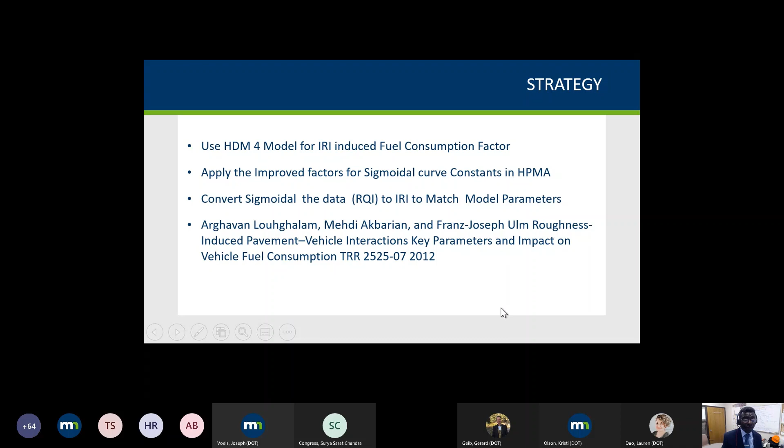But if you want to analyze IRI-induced fuel consumption, that's roughness-induced, and there's a performance curve for a particular intervention, that curve has already taken a lot of things into cognizance, and can be used as a comparative method. Over the years these performance curves have been developed, and we're not here to reinvent the wheel. A lot of work has been done. A lot of people developed the HDM-4 model and transcribed it into fuel consumption in various ways, but nobody has actually used the performance curves, and that's where we come in.

Over here, we'll be mentioning ride quality index. What's ride quality index? This is what MnDOT uses in its pavement management system. It is a rating ranging from 0 to 5, where 0 is extremely horrible and 5 is very good.

When a pavement is new and pristine, what we expect is that when people ride on it, they'll have a rating of about 5. That's what we always hope for. That might be utopian, but to a large extent that's the hope. Some do make very close to it.

In those days people would grind to about 70 inches per mile, but these days people grind to about 30 inches per mile. So technology is improving, and you'll find people really hitting that 5 very well these days in terms of the ride quality index.

How do we do it? We blindfold - well, we don't really blindfold people. We have individuals ride on a particular section and score it, and some of them are wise enough to close their eyes so they're not influenced by other things, like thinking the scenery is so beautiful that it must ride well. No. So with that rating, we use a vehicle.

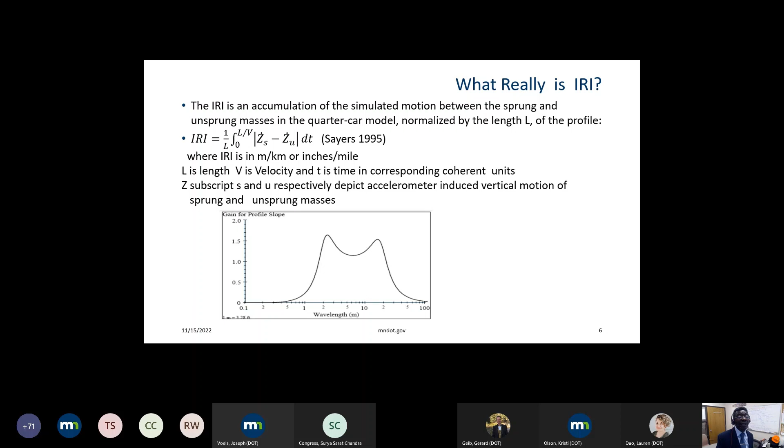The quarter car algorithm has a multiplier, or a gain function, that amplifies certain frequencies to the point that you have body bounce and axle hop. These are the two peaks that you see in that gain algorithm. So the IRI measurement, what the quarter car tries to simulate, is really how you feel based on certain waveforms. So it's not really just the profile itself, but what the quarter car interprets that profile to be in terms of how comfortable you will be riding on that surface.

Concerning the fuel consumption that's based on IRI, MnDOT has had a lot of studies. In 2011, we brought to the United States the Technical University of Gdansk, Poland, within a certain extension of a pooled fund. They came in 2011 and 2014, and one of the things we found out was they did a distribution to see how rolling resistance behaved.

Talking a little bit about the kind of rolling resistance they measured, they canceled out IRI, because IRI in itself will work within rolling resistance and will work under powertrain as well, in terms of the resistance the vehicle undergoes while operating on the roadway.

So people, the Mark IV, actually did cancel out IRI so that we were left with rolling resistance. Now, rolling resistance is a measure of the kind of resistance the vehicle encounters while moving, and that resistance is not due to aerodynamics, neither is it due to friction, but it's a resistance that the surface imparts on the vehicle. So because of the confusion, and the fact that there's a lot of intersection of rolling resistance, IRI, and friction, and people are not able to really separate one from the other, the feds now came up with PVI. So when they're analyzing all these things that have to do with rolling resistance, effect of IRI, effect of deflection, and so on, they will just say PVI, which is pavement vehicle interaction.

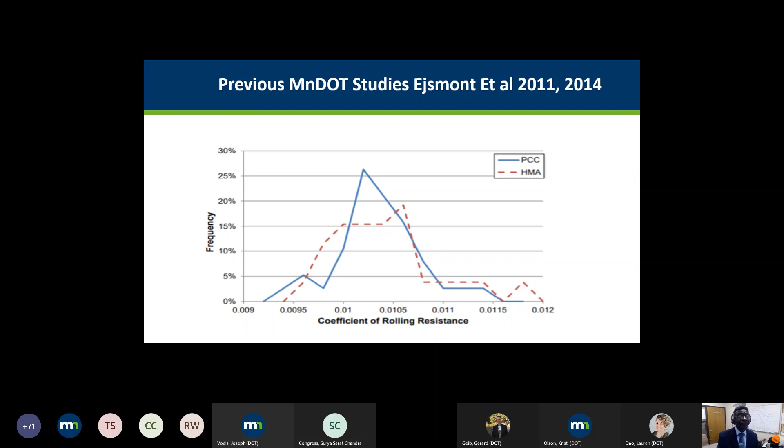So when we saw these, we retained a company called FuelMiner, and we made them go to two very poor riding sections. Highway 66 is an asphalt pavement, and Highway 10 in Staples is a concrete pavement.

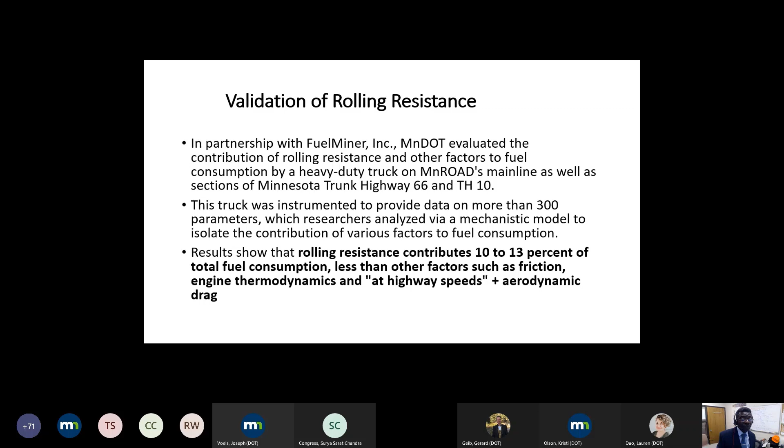What they found actually showed that there were some features which they had already originally interpreted as rolling resistance. There were some features in the concrete occurring at a certain frequency, and with that frequency they could pick up that there was a real energy loss in that concrete, coming from the joints, because the joints were actually shot due to the age of the pavement.

There was a lot of faulting, but it showed up probably as poor IRI, and they did notice that it was contributing tremendously to the power loss in the vehicles.

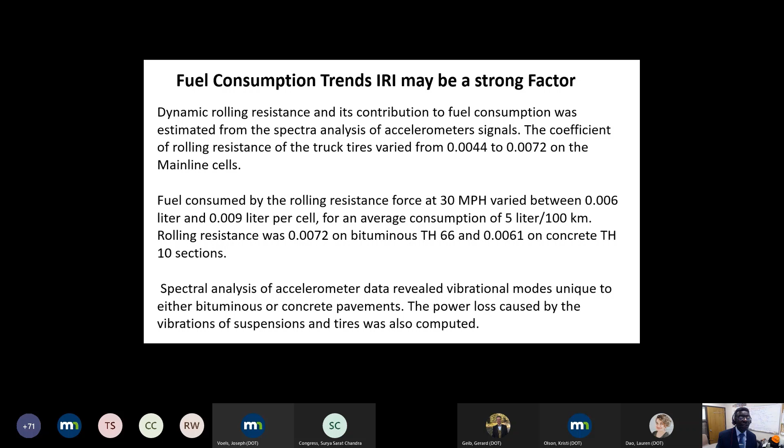They made the same observation at MnROAD. There's a 2.9 Hz concrete power loss. So you can see those are the features that trigger IRI: faulting, warp and curl, all manner of distress types.

Those are the things that trigger IRI.

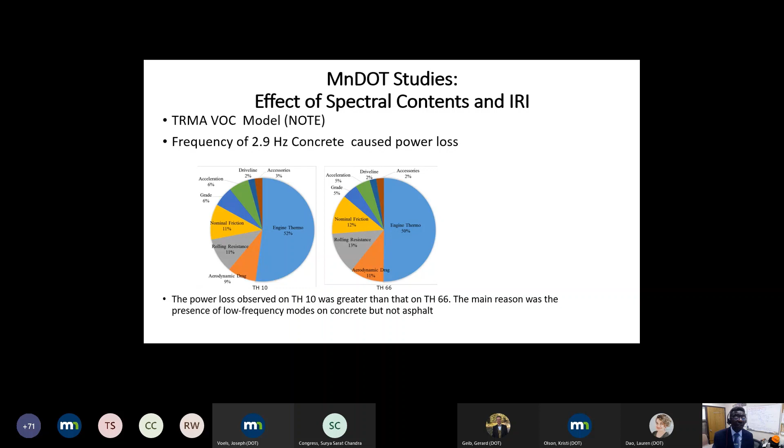But even when looking at the effect of IRI on fuel consumption, FuelMiner picked up the IRI-implicating features of certain pavements and projected them to be causative to the calculated fuel consumption in those test cells, as well as the network test cells that we looked at.

So when we brought the Technical University from Gdansk, Poland, we used the Mark IV, which is the number one rolling resistance measuring equipment in the world. We brought them here, and the principle by which it works, you saw some 0.003 — it's a torque divided...

I just want to go back to the fundamentals of mechanics. When you have your moment of inertia and you have angular acceleration, what the Mark IV actually does is, at the end, it converts that angular acceleration into a torque, and the angular acceleration into just a rotation in radians.

So when you see a rolling resistance measurement of, say, 0.003, what does that mean? It's just a torque, and it's the angular acceleration, the angular displacement that is due to a torque. That's what the Mark IV normalizes.

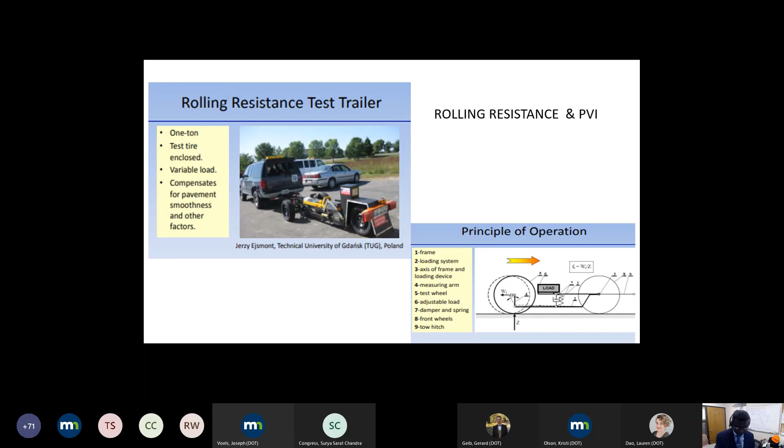But they had to cancel out IRI so they could get just the effect of rolling resistance in this device. It told us a lot, like the kind of fuel consumption numbers — there are a lot of variabilities, but something like a 10% saving on rolling resistance will result in 2 to 3% reduction in fuel consumption.

There are a lot of variables that can influence that, but these are some of the findings we made when the Technical University of Gdansk came and did their measurements at MnROAD. They came in 2011 and then again in 2014.

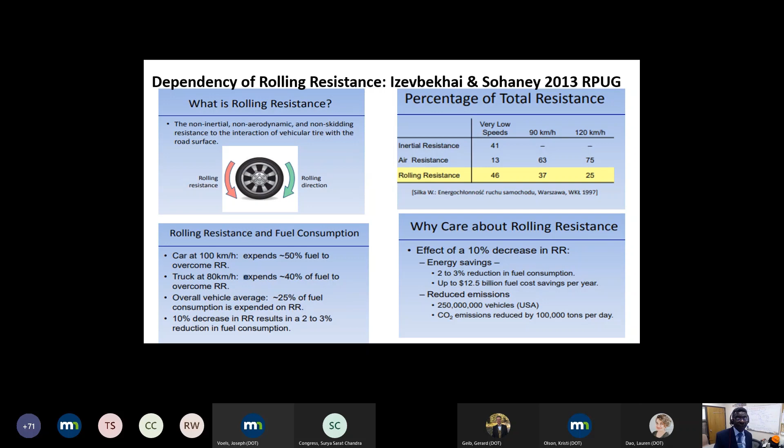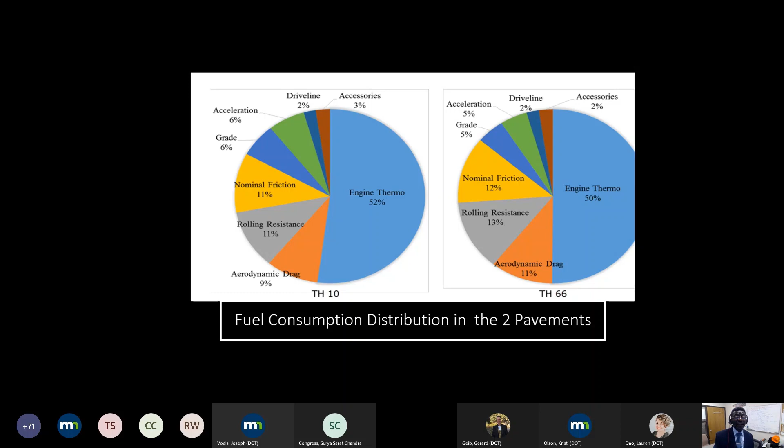It's working against certain features, certain distress features, things like faulting, rutting, as the case may be. And so it's within that enclave that we believe very strongly that the fuel consumption belongs.

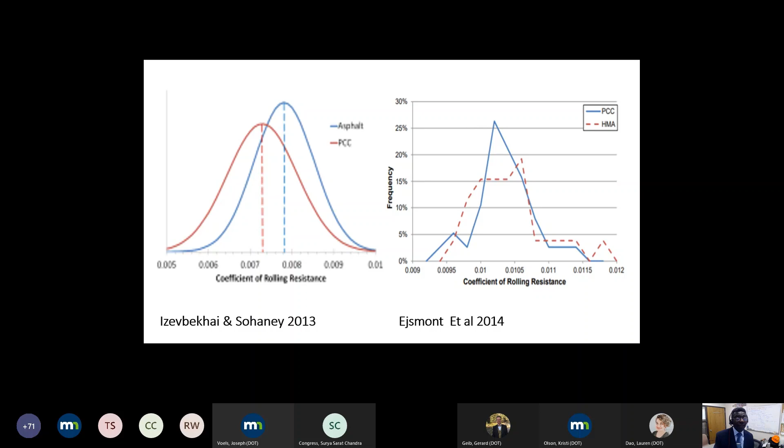So here we have a situation. Again, this points us to the fact that there's a lot that can be done. If the pavement rides well, you are likely to have improved fuel efficiency.

Okay, so I created that little envelope to show the area where I believe the fuel consumption belongs. I'm going to show something here using a method, a not too common didactic method, and I'm going to give you this result. Then from this result, I will go back and tell you how we arrived here. I'm watching my time now.

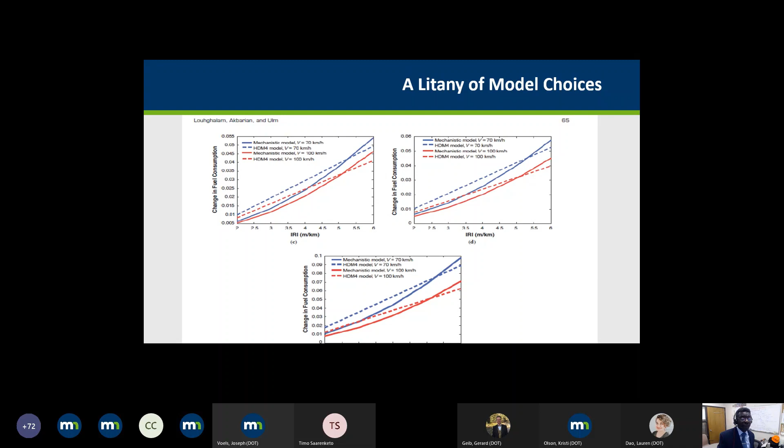We went into a lot of studies and arrived at the fact that the HDM-4 model was actually robust, and it had been developed over time, and it has stood the test of time. So we chose from all these the HDM-4 model, and that's essentially what the HDM-4 model provides in terms of a relationship with IRI.

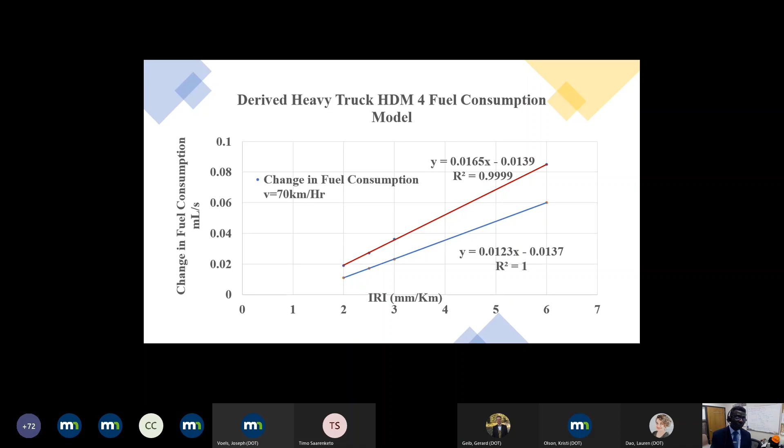Lauren, was there a question or something? I think someone got unmuted somehow.

Okay, all right. So the beauty of a sigmoidal model, and I'm glad that MnDOT has a sigmoidal model, is that it has to mimic the way pavements behave when they are failing or approaching terminal serviceability. There is a zone, the near-horizontal zone, where you can do your preventive maintenance. Because if you do preventive maintenance when your pavement is already going into disarray, it doesn't make sense. It's not preventive at that time.

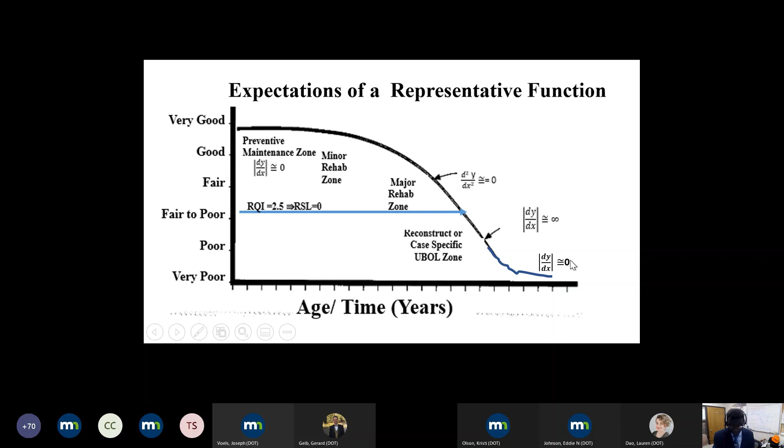The sigmoidal curve looked very complex, but it's a sigmoidal curve you need to mimic such behavior. That's why if you just use a decay model, the one that just keeps going down, you might not really capture those features over time. So that's the reason why we favor the sigmoidal model.

And it's been able to, when we made a proposed remaining service life, what we did was we changed things. We were able to do curve fitting, and we did reduction of the squared residuals to 0 in order to arrive at the new values at which this function is satisfied, and that's why we were able to propose the new curve. So that's how we had the proposed instead of just using the current. For the current at that time, we just used what was there, but for the proposed, we changed these based on how the pavements were now performing.

And I don't see any reason why it should be any less with us who are doing infrastructure. And I challenge every state of the union - after the freeways were built, we have enough time for most of our interventions to have reached a stage where we can actually define their performance curves. And the Weibull method is the best method to do that.

The good thing about the Weibull method is that it doesn't tell you what to assume, unlike other statistical tests that say, well, assume a normal distribution. Weibull doesn't tell you to assume anything.

It solves the problem. It gives you the location parameter, which is your preventive maintenance window, very important. It gives you a window where you can do very little things to extend life. Then the scale parameter is the service life we're talking about, the characteristic life, which is the 63.2 percentile value of your service lives.

Based on that would be not the PDF, but the cumulative distribution function, the CDF. So it will be the 63.2 percentile value of the cumulative distribution function.

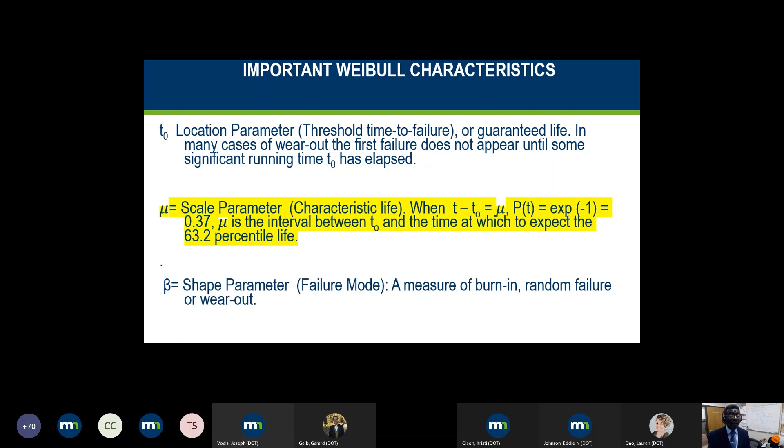Also, you have the service lives that we got from the Weibull analysis, and the arithmetic for Weibull analysis is so simple. You can do it straight from your Excel spreadsheet or any analytical software, or you can just do it by yourself without even invoking any software. It's such an easy process, and I've put the equation for the characteristic life there.

Two ways of determining the Weibull gives you two ways of determining the service life.

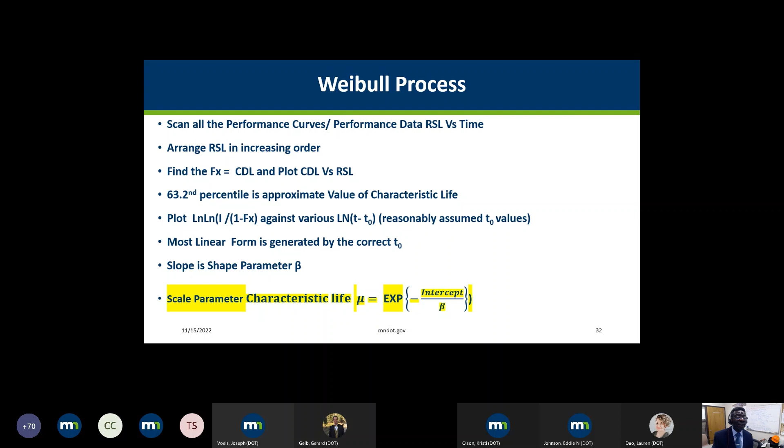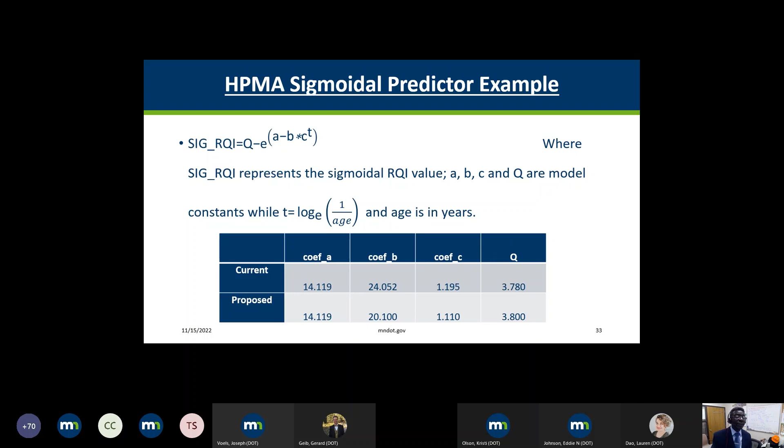Just to give an example of how we did the sigmoidal function, that's the current and the proposed based on curve fitting. I believe this may have been unbonded overlay. We did that, and then proposed what was proposed, to give to the pavement management unit, but they're actually doing it this time around so that they have things more current than 2018.

Okay, how about IRI? Why are we even concerned about IRI? The quarter car has features with arithmetic values of the dashpot constant, the spring constant for the unsprung mass and the sprung mass. It's the vibration dynamics of the quarter car that gives you your IRI. So it's mimicked by the quarter car.

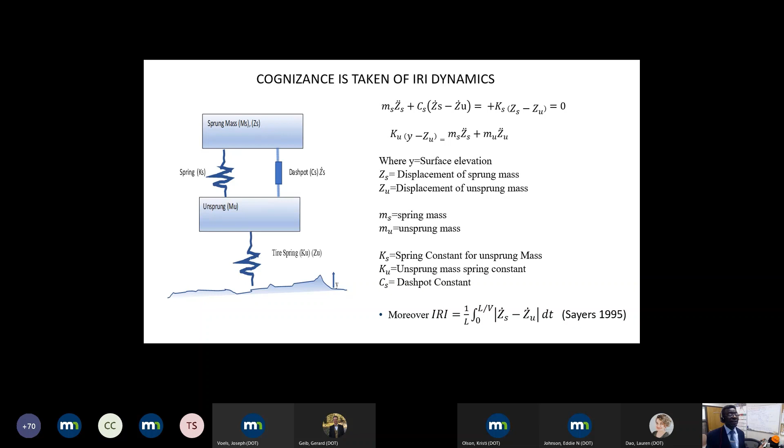If the pavement is rougher, it will have more influence on the unsprung mass, on the spring of the unsprung mass, and then the spring of the sprung mass. At the end of the day, it will give a different value. So what's happening in that figure is what influences what the quarter car will finally spit out. The roughness of your pavement is truly measured by the International Roughness Index.

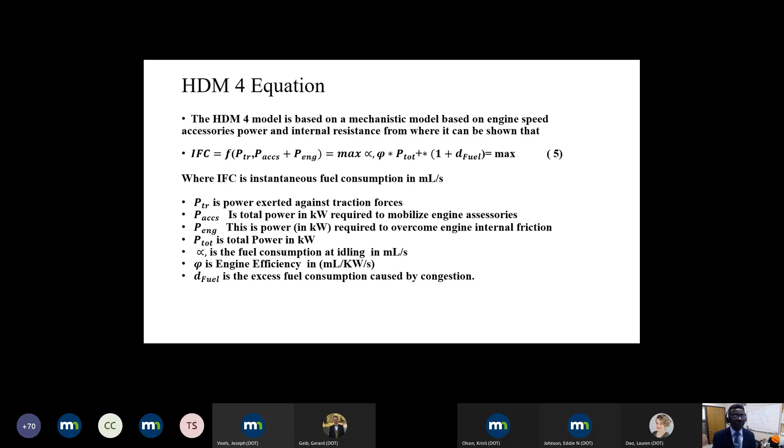Now, there are a lot of complex equations out there, including the HDM-4 equation that does a lot, with fuel consumption and all that. But remember, the work done by Louhghalam, Mehdi Akbarian, and Franz Joseph developed the curve we showed at the beginning that had IRI on one axis and fuel consumption on the other, derived from this equation we are seeing here. I still felt to put it here because this will be available - I believe the YouTube video and this presentation will be available to all who seek it.

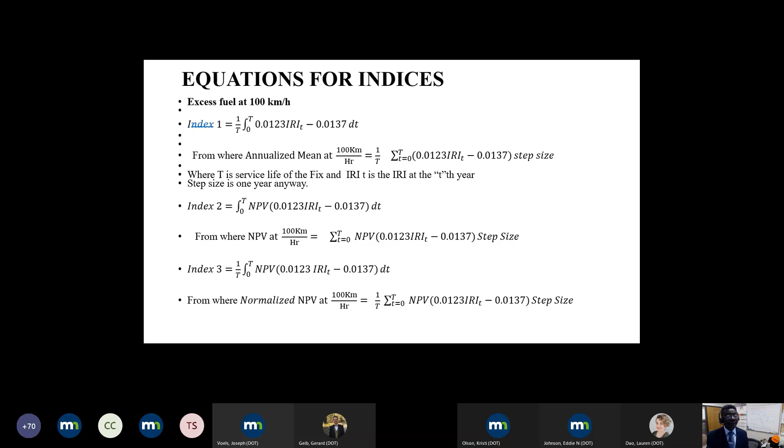Now I'm going to run through these equations we use. We developed these equations to convert, and these equations are represented by that curve for 70 kilometers an hour and 100 kilometers an hour. You know how significant those are in our network. So for the cascading, we obtained the precedence from our pavement design engineer.

So it shows you here what follows after a BAB construction, and what follows after a CD construction, and so on, what follows after that and after that. So we use the service lives that we already had, and we still show these precedents after that. So in your state, you have your precedents, you have your intervention sequence, which might be different from this.

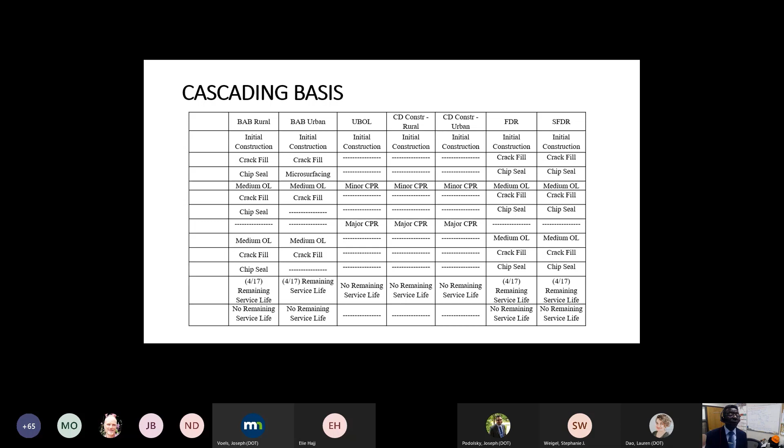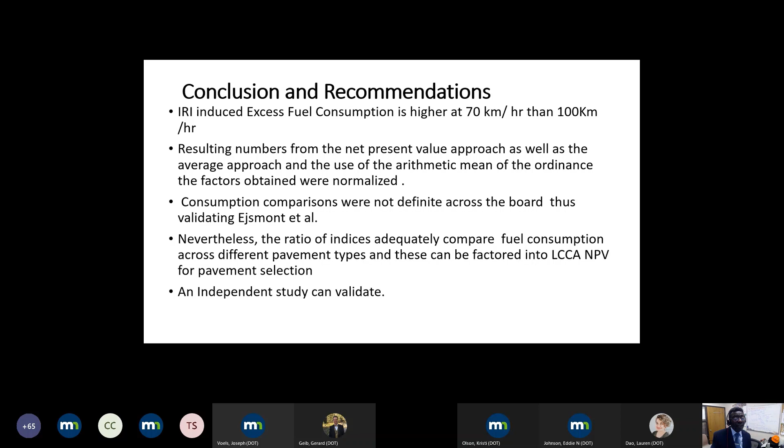Initial values are reduced. Aerodynamics do play a part, but we tried to isolate this from the analysis. Rolling resistance across the board and the corresponding fuel consumptions are pretty close, I would say. I know a lot of people like the MIT studies, but what we have is what we know, it's what we did. We brought the Mark IV from Technical University of Gdansk, Poland, and the values we got show close proximity, and an ability to do a lot by making your pavements smoother. You can help your fuel consumption a great deal.

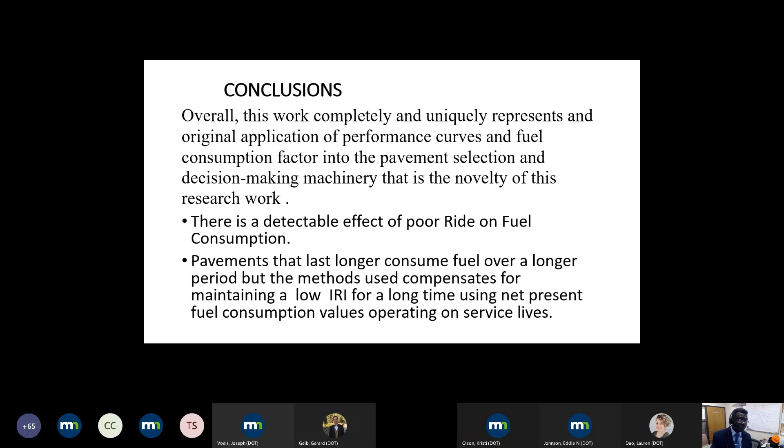Now, still something that people are wondering, why haven't I mentioned it up to now? Excuse me, sorry. Okay, there's something wrong there. Okay.

While doing this life cycle cost analysis, if we have certain powerful indices like what we found out, they can be used in a rational way as multipliers for the life cycle cost analysis. The main reason we did this was there was a legislative move that actually required us to do this calculation. Although they haven't formalized it, haven't made it a law, this calculation is going to be required so that a factor based on fuel consumption of pavement types will come into the process of LCCA. Although it doesn't happen yet, it can happen at any time.

But we have preemptively done this, and who knows, it might happen in another state before it happens in Minnesota. But Glenn and I, with Glenn's leadership, we decided to do this anyway, ahead of time, so that somebody can come later and apply these indices, either geometrically, arithmetically, or exponentially, in the life cycle cost analysis process.